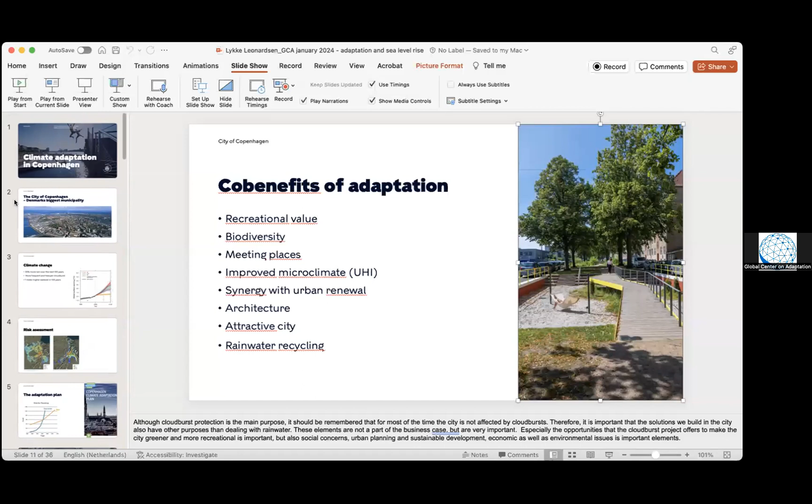Thanks. Thank you, Nick, for this very kind introduction. I hope somebody can put on the screen the first slide. Oh, thank you. Sorry, that's Copenhagen. Sorry, yeah, no. So we need the Rotterdam presentation. Yes, exactly, thank you very much.

Thanks, Nick and others, for giving me the opportunity to share our experiences on the city of Rotterdam and how we are adapting. Let's move to the second slide. That's okay, because I think it's always good for the audience to start with the bigger picture, the bigger map of the Netherlands.

On the next slide, you can see the reason why water resilience will always be on our agenda. Water is coming from all directions: from the sea, from the rivers, we have precipitation that is changing pattern, and groundwater levels are changing. But at the same time, we as human beings have been paving and making the city more concrete. It is a concrete jungle, as we could call it. We are urbanizing, building more houses and high-rises, and that is already creating a lack of water storage.

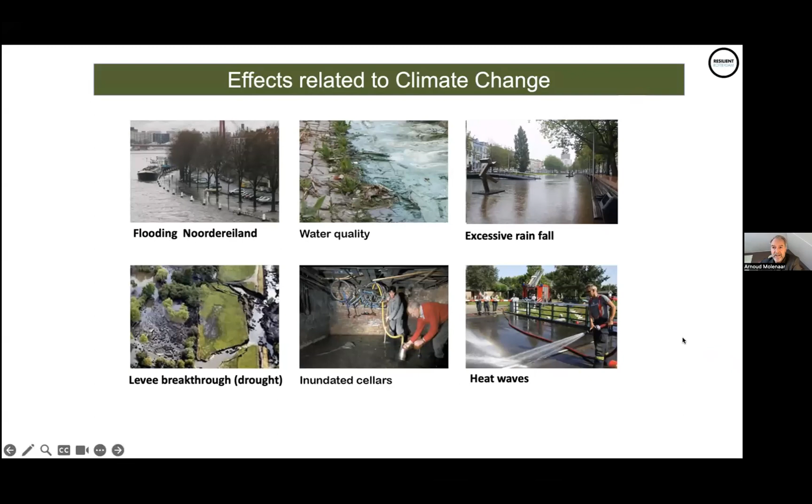I think we are now in the second edition of our climate adaptation strategy, and also the second edition of our resilience strategy. So it's a process, and it's iterative. It's getting more and more integrated, and that's the message I want to share with you using this slide.

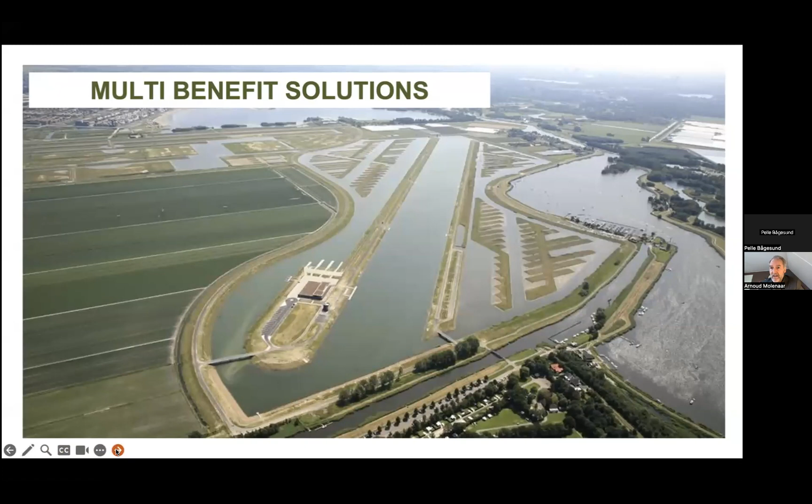Actually, we really want to spend our money more in redesigning the public space, and to add more urban quality, and at the same time allowing and creating more water storage. So we are working on an adaptive and attractive city at the same time.

So another type of solution is, I think, well known, but we have been implementing nearly 600,000 square meters of green roof in all types. We started with the easy ones, you could say, the quick wins.

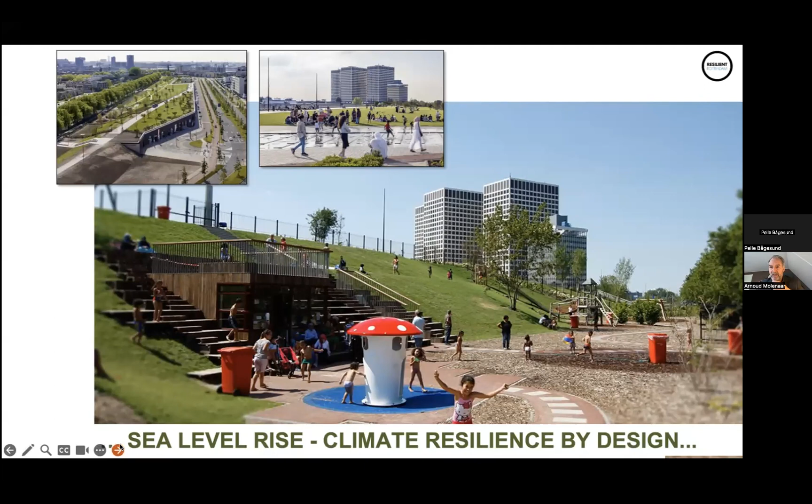And the next slide shows another type of solutions that we are working on, what we call the tidal parks. So we are a coastal city with a huge coastline and river, and we are also a port, of course, and that's why we have a lot of concrete embankments. That's of course necessary for a port.

At the same time, we identified a lot of kilometers that we can transform into more natural embankments. And this is creating new habitat. It is also reducing the velocity of waves. So this can also be seen as part of becoming a more climate adaptive coastal city, using nature-based solutions in this case.

And another final type of solutions is what we call floating urban development. We call it pilots, but I don't think we can call it pilots anymore. We are just developing on a larger scale and upscaling this: floating homes and offices and buildings, and even a floating farm.

And this is not comparable with the simple boathouses in the inland canals in the city. This is all on water with a high tide and low tide difference of 1.5 meters, directly connected to the open sea. So we see in this way of developing our Delta city also an opportunity to create additional urban space with quality, waterfront, etc. This is a high value place in the city.

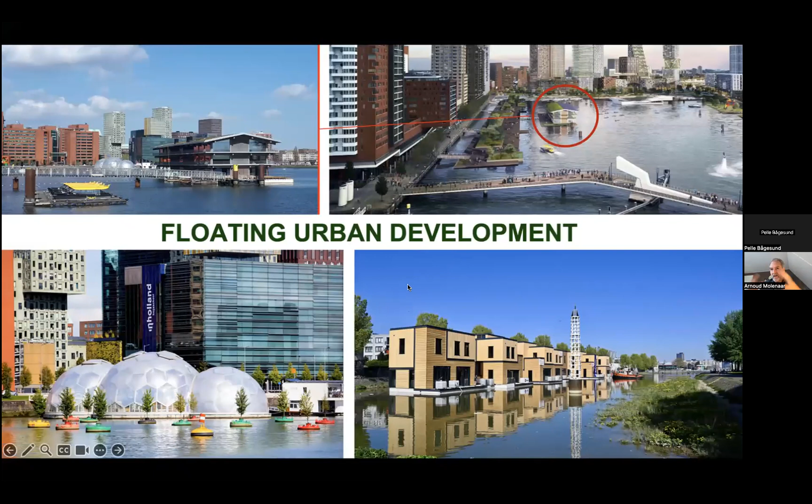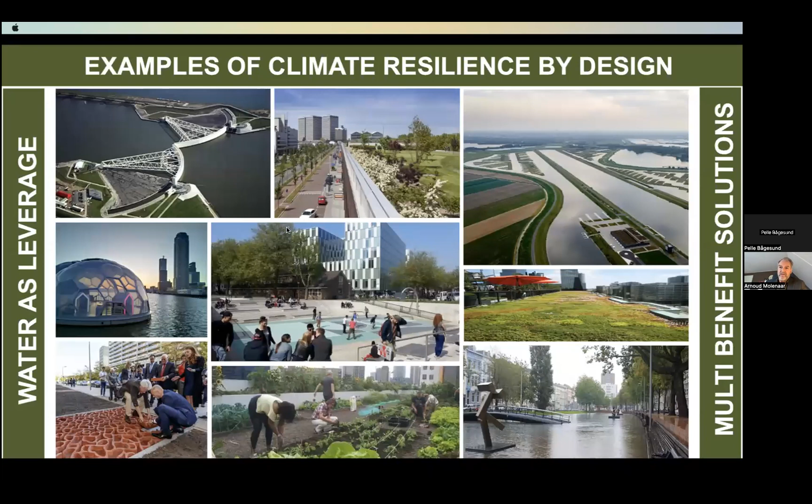So the next slide shows a whole overview of all types of solutions. I think I had to speed up a little bit. We are also thinking ahead, because we want to invest in more integrated solutions, even more integrated than we have done so far, like this one.

So not only developing and using our flat roof landscape just for greening the city, but also in combination with the mitigation ambitions that we have. Solar panels are more efficient on a green roof, that has been scientifically proven. So you can use your roofs for mitigation and adaptation at the same time. This is just one example of how you can use your rooftop landscape in a good way.

And the next slide shows an example: that's an artist's impression about the Rijnhaven, where also the floating office of the GCA is located. Here we are, about the master plan of this old port area where we are creating a floating park.

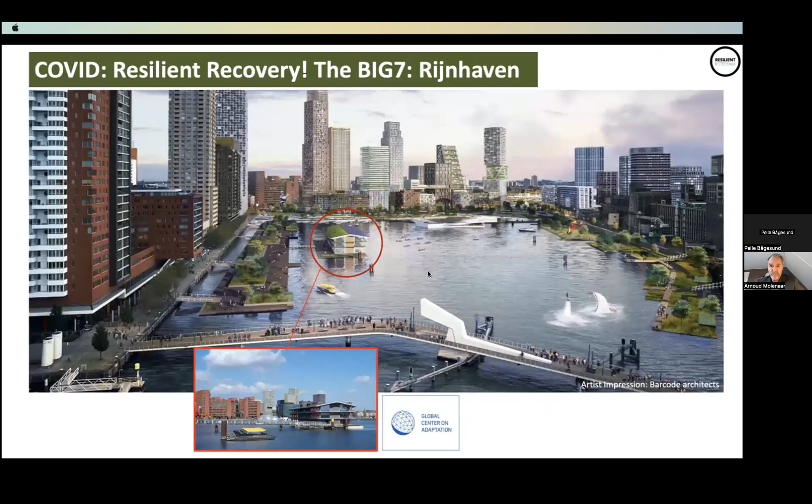And this is one of the big 7, as we call it. This has been announced during COVID to really give the investments and the economy a boost in the city. And all these big 7 projects, as the next slide also shows as an example, they all include adaptation. So we want to use adaptation also from an economical perspective, to give the city an impulse.

This will become what we call the Rotterdam High Line. It is an old railway of a few kilometers right in the center, and it will be transformed also into a longitudinal park, which will add again urban quality and biodiversity.

It is good for the people living in these neighborhoods, but it will also improve and increase the adaptiveness of the city.

And finally, I'm nearly there, Nick. We are also looking ahead into the future, because we realize that climate change is not only there; it is accelerating.

So we are now not only looking at the consequences of maybe 1 meter sea level rise, but also looking at how we have to look at the spatial development of the western part of Holland, including Rotterdam, taking into account maybe 3 meters of sea level rise or even more. What are the consequences of this? How and where do we have to invest? So this is really an important thing.

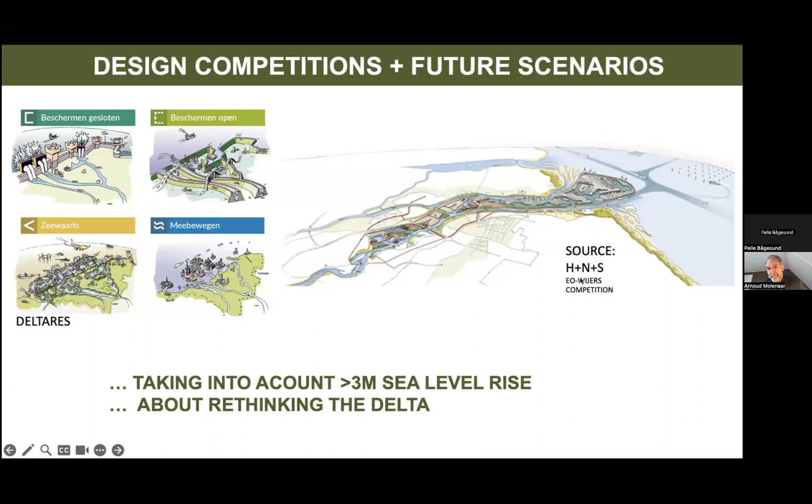And I think it's interesting also to share with other coastal cities. And then, of course, we're not doing this alone. I think this is why we have this webinar, it's good to share our stories. So what are the opportunities, but also the challenges, especially regarding the long-term future and accelerating sea level rise.

Some cities are talking about managed retreat, and what I would like to propose is to start a working group with some coastal cities to have a dialogue about this. One possibility is to also use the city networks that we are part of, and in this case, we are happy to be a member of the Resilient Cities Network.

So that brings me to the final slide, just some concluding remarks. I think it's good for the audience, we can share a PDF of the presentation, of course, but just some final remarks.

It is a data-driven approach, you could say, also a holistic approach. It's not just investing in adaptation because we have a problem. No, we want to become an attractive city using climate adaptation. So we turn it around, it's a paradigm shift, you could say.

And the ownership amongst all stakeholders is, of course, an important one. But also, I haven't talked a lot about that, but the involvement of the residents, which is done on specific projects in the districts, that is also really crucial. I think I'll stop here because I already talked, I don't know for how many minutes, long enough.

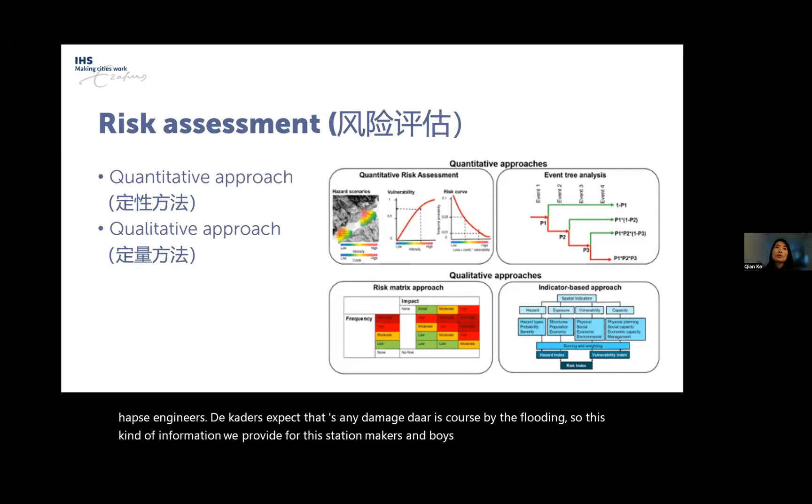We also have the approach of event tree analysis, which is more about determining the occurrence probability of one hazard, through the steps of different failure events, then we calculate the occurrence probability.

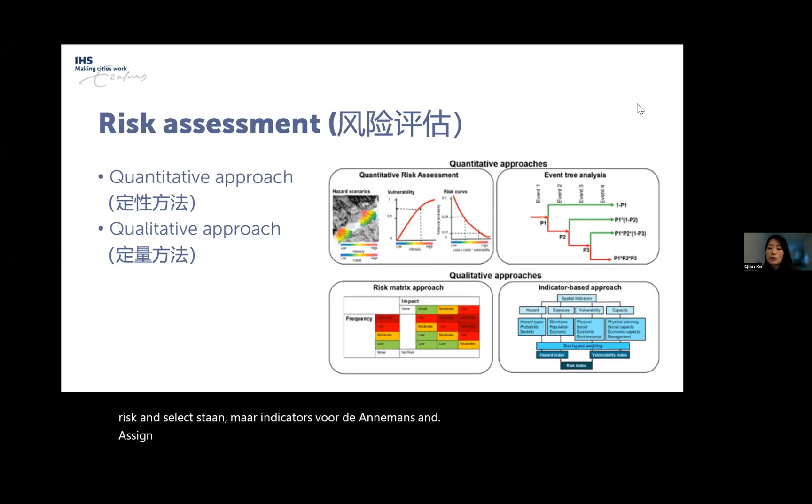For the qualitative approach, we use the risk matrix approach, because this approach can be used for assessment of whole cities, for different kinds of natural hazards, and also for one specific area. This approach considers the components of risk - frequency and impact - and the indicator-based approach also considers all the elements of risk, selecting indicators for these elements and assigning scores and weights by expert judgment, and in the end we calculate the risk index.

In the next presentation, I'm going to focus on the quantitative analysis. But first, here's an example to show the risk matrix we can use to further inform our decision makers by assigning scores for the likelihood and impact.

These are the two important components of risk. In the end, we get the risk score, and we can put a label for the rating from low to very high risk.

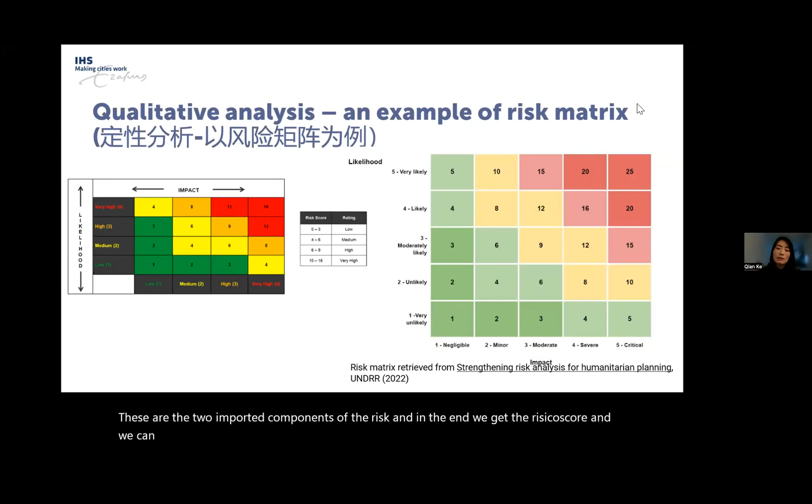For the quantitative analysis, we first follow hazard modeling, exposure, vulnerability assessment, and then calculate the risk. The first step is to calculate the occurrence probability of flooding. We calculate this based on long-term series of hydrologic data, so we can determine the occurrence probability of a given water level, and then produce flood maps based on the hydrologic model. The flood maps provide information about the inundation extent and maximum inundation depth, etc.

For damage assessment, we use GIS data to identify how much population and economic assets will be exposed under these kinds of events. Then, based on the vulnerability curve, we calculate how much potential damage can be caused, and in the end, calculate the risk.

What kind of data do we require for this quantitative risk assessment? Starting from the hazards, we need to use statistical models, usually based on long-term series of hydrological or meteorological data, to identify the different return periods of flood events. We use this data as input into hydrologic and hydrodynamic models to calculate the rainfall runoff and also the water level in the river and the sea.

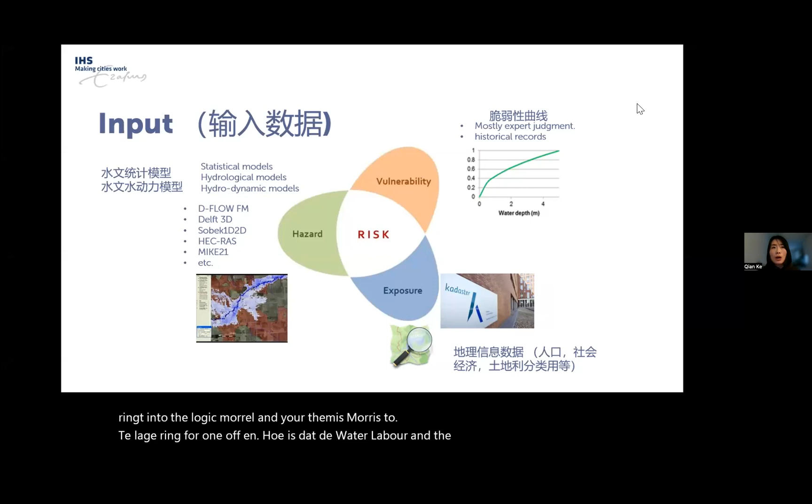Some very popular software we can use here in the Netherlands is Delft3D and D-Flow Flexible Mesh, and also Sobek 1D2D. In some other countries like the USA we use HEC-RAS, and also in Denmark we use MIKE 21. So there are many alternatives we can use to help assess the hazards.

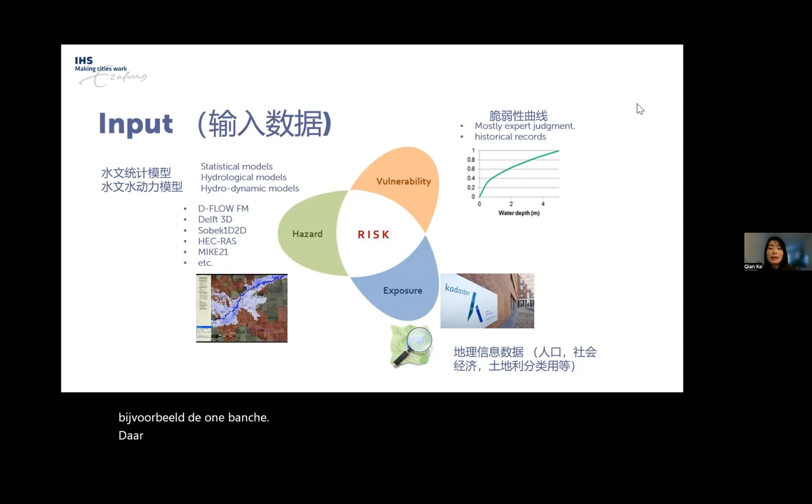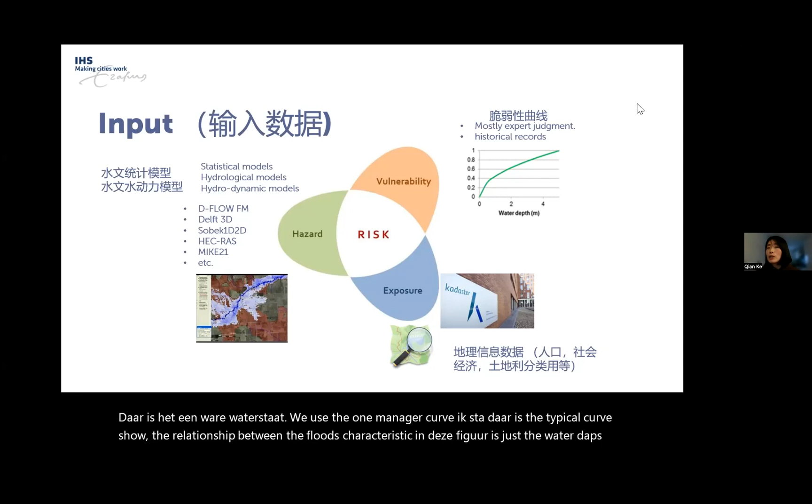For the vulnerability, we use the vulnerability curve, a typical curve showing the relationship between the flood characteristics. In this figure, it shows the water depths and the potential damage degree or absolute damage value. This kind of data we get mostly based on expert judgment, and we also collect historic flood event records to produce such vulnerability curves.

For the exposure, that is more about the GIS data - population maps, socioeconomic maps, land use maps. These kinds of maps can help us identify how much elements at risk will be exposed.

For the hazard modeling, let's take the coastal city as an example, like Weihai, which is frequently affected by tropical cyclones - here in China we call it typhoon. The typhoon usually brings storm surge and waves, and also simultaneously brings a lot of rainfall. These cause high water levels and also failure of the sea dikes, and overtopping discharge in the coastal areas, which eventually causes flooding inland.

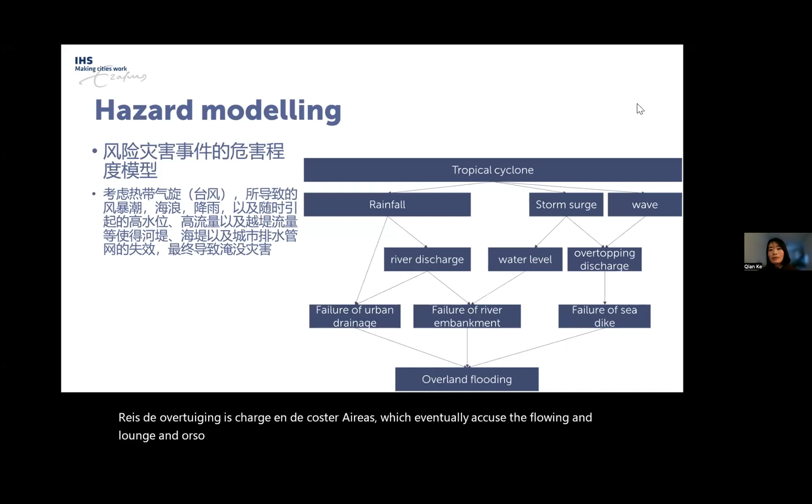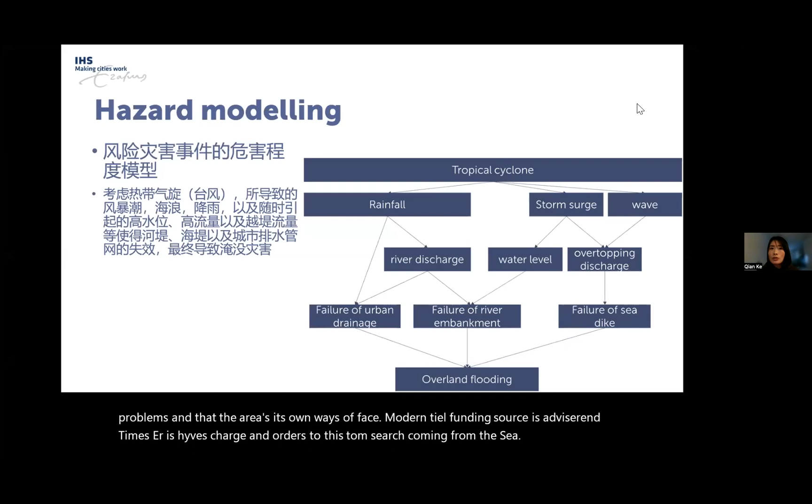The rainfall will also cause high river discharge, and that is a very typical problem in delta areas - they always face more than two flooding sources at the same time. There is high river discharge and also storm surge coming from the sea. The high river discharge also sometimes blocks the drainage, significantly undermining the drainage capacity in the city. That is the main reason causing urban flooding in coastal cities.

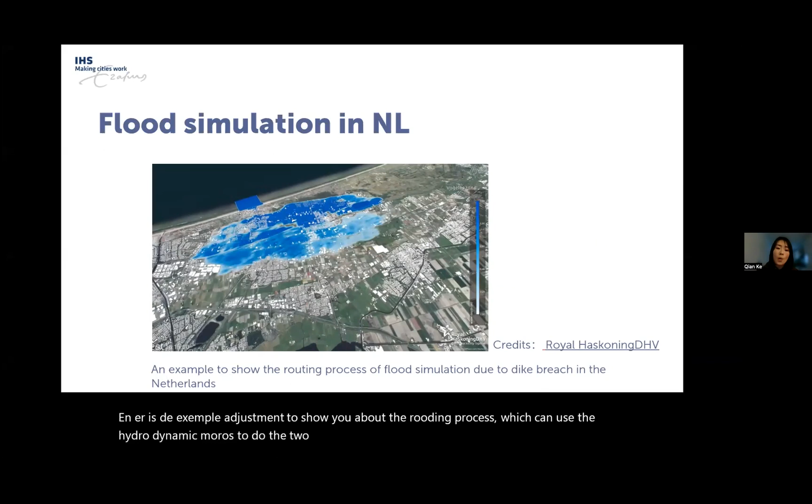There is one example I want to show you about the routing process. We can use hydrodynamic models to simulate the flooding. This example shows flooding due to a dike breach in Rotterdam, in the coastal areas in the Netherlands, and it shows how the flooding expands inland, with the blue and gray colors showing the different inundation depths.

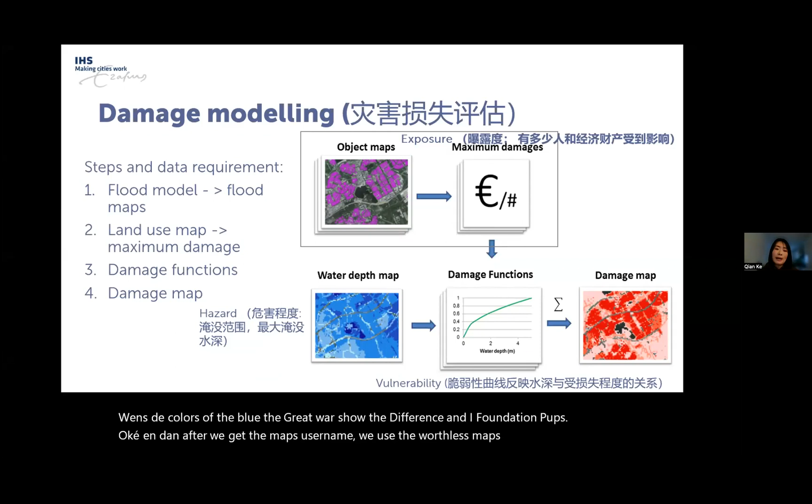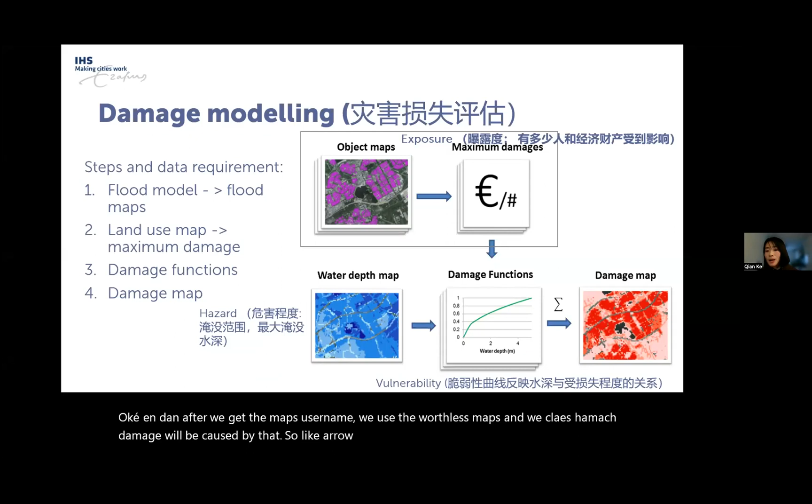After we get the flood maps, usually we use the water depth maps and calculate how much damage will be caused. Like I already mentioned, we use the vulnerability curves, and also based on the GIS data, we can produce damage maps, which provide information for decision makers to check how much damage is caused in some specific area. Then we can decide what kind of measures to take next.

For the risk assessment, in the end there is the result about total risk. We combine many different events into maps or aggregate damages for different exceedance probabilities.

After we get the risk map, the government will think about proposing some adaptation measures to deal with the flooding. Usually we use cost benefit analysis to trade off the costs and benefits, and to evaluate and prioritize the list of climate adaptation options. This is also important for the government in optimizing the allocation of resources. The question answered by the cost benefit analysis is how much should be invested in which adaptation options, and at what time, to create the highest benefit at reasonable cost and within available budget.

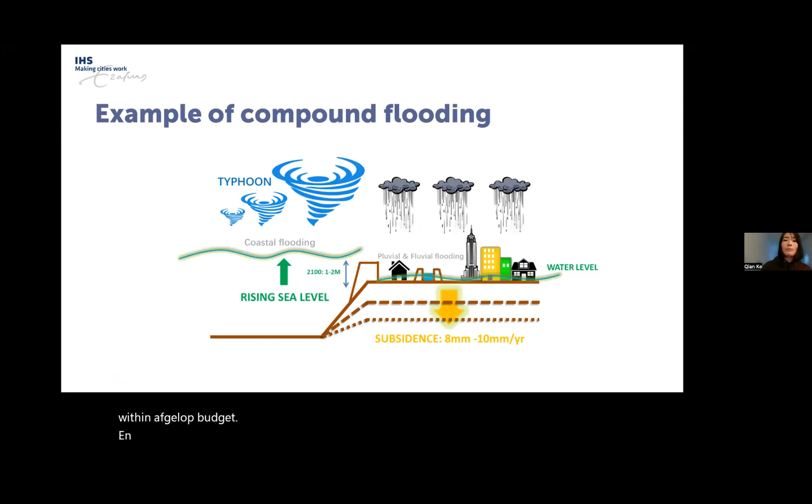This figure shows an example of compound flooding in Shanghai, actually a project I did before. So when we do the coastal climate risk assessment, we have to take into account the different flood sources that can occur simultaneously or subsequently in a short time.

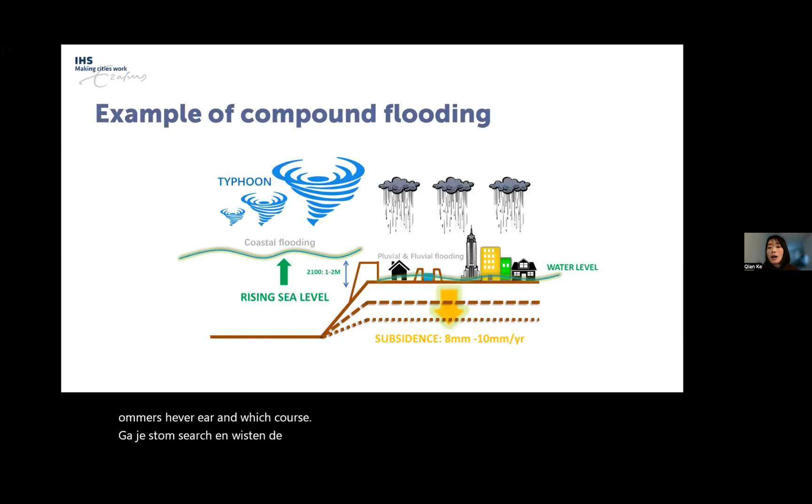In Shanghai's case, it's also affected by the typhoon almost every year, which causes high storm surge, along with the possibility of high astronomical tide occurring in coastal areas, which can cause coastal flooding. At the same time, the typhoon also brings rainfall, which causes high river discharge in the upstream.

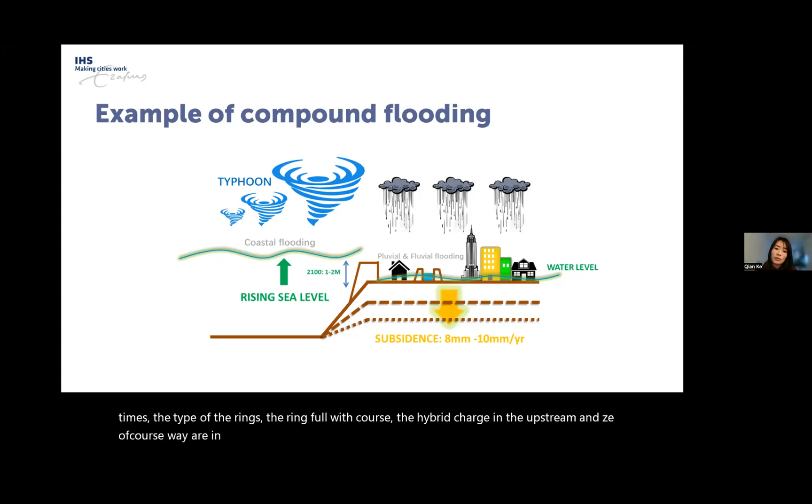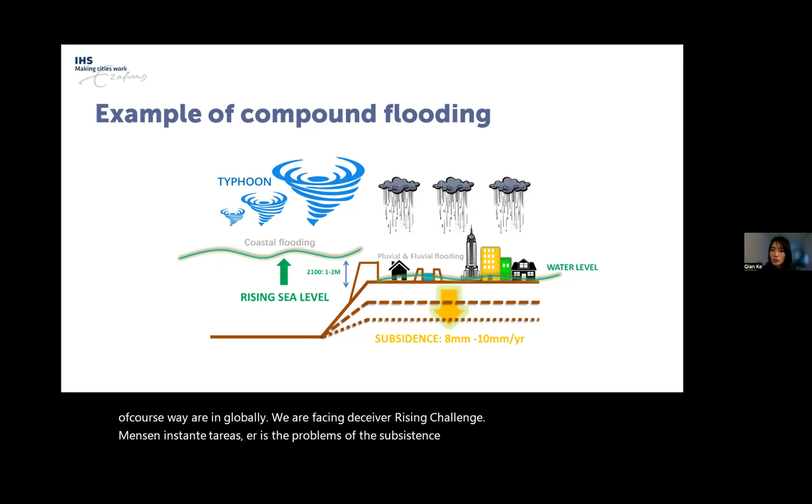Globally, we are facing the sea level rise challenge, and in some delta areas there are problems of subsidence. So these problems are coming from different directions, which pose threats in the future.

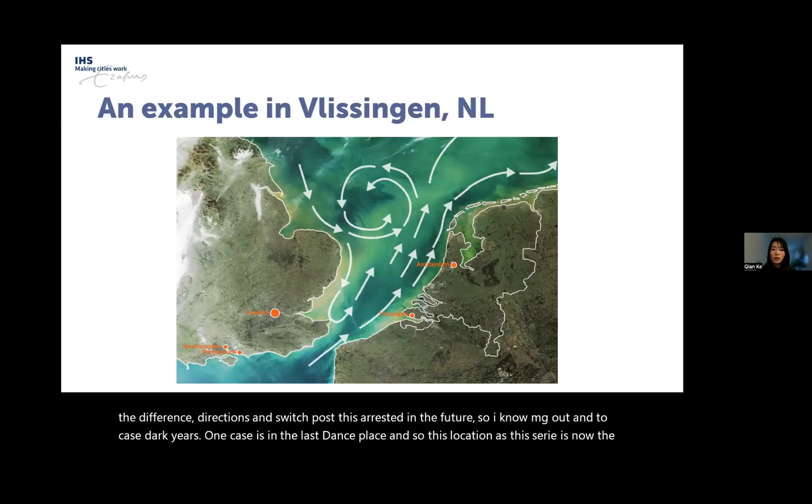Now I'm going to talk about two case studies. One case is Vlissingen in the Netherlands. This city is located in the southwest province of the Netherlands, at the connection of the North Sea and the river Westerschelde. Because of this connection between sea and river, Vlissingen is very vulnerable to tidal effects and storms during winter time.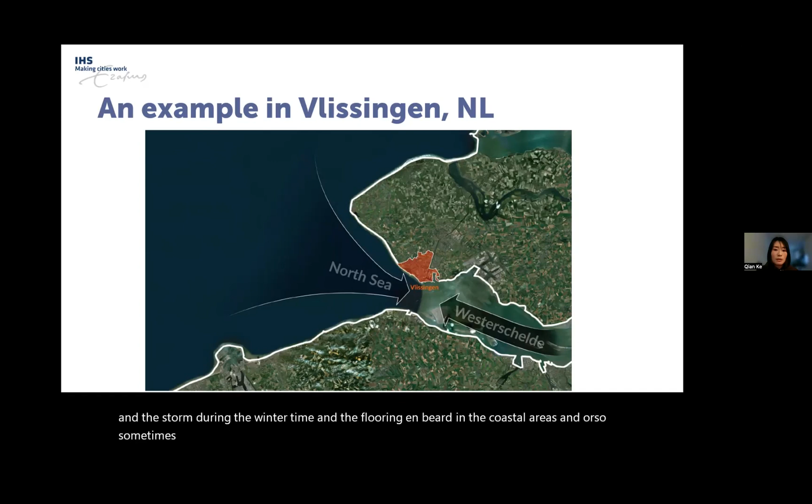Flooding can occur in coastal areas, and the government is also concerned that in the future, with sea level rising, it could cause urban flooding in the cities. The local governments were thinking about two adaptation measures: one is to increase the height of the dikes, and the other is to redirect and store the flood water.

Here are some design ideas about redirecting and using retention areas to temporarily store the flood water. You can see the blue colors, which show how the water can be redirected into the inland area.

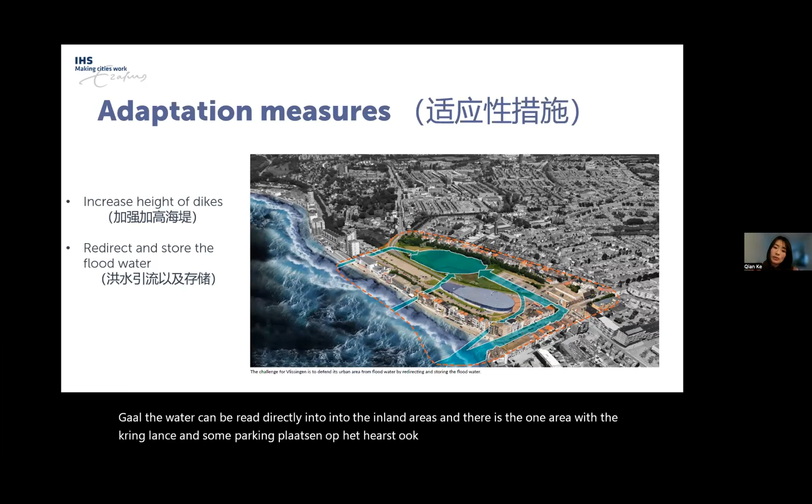There is one area with green land and some parking plots. The government is thinking they may use these areas to temporarily store the water, and after the flooding, they can pump the water out into the canals or other waterways. That is the idea.

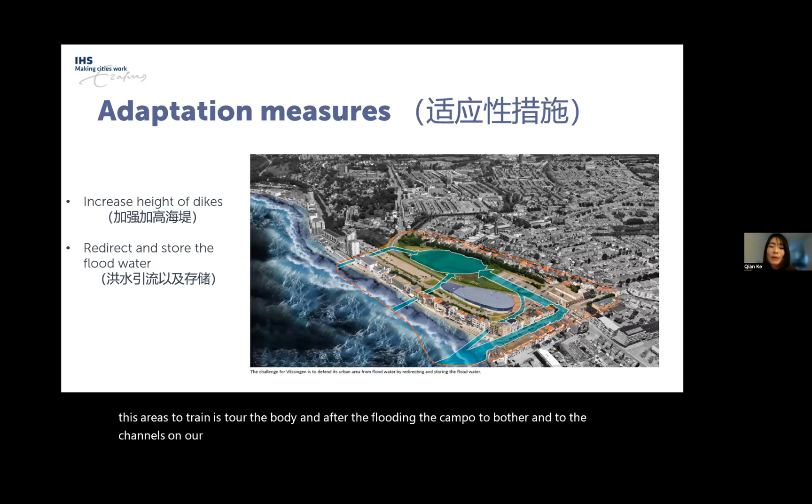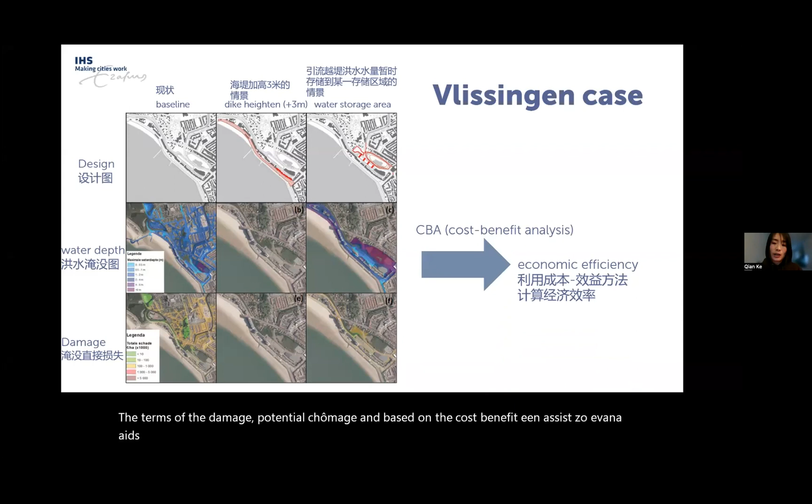After that, we got water depth maps for the baseline and two scenarios, and we compared them in terms of potential damage, based on cost-benefit analysis, to evaluate the economic efficiency of the two proposed adaptation options.

Some preliminary damage assessment results here. According to Dutch methods, we can calculate how much economic damage can be caused by the flooding, and also how many people will be potentially killed or affected.

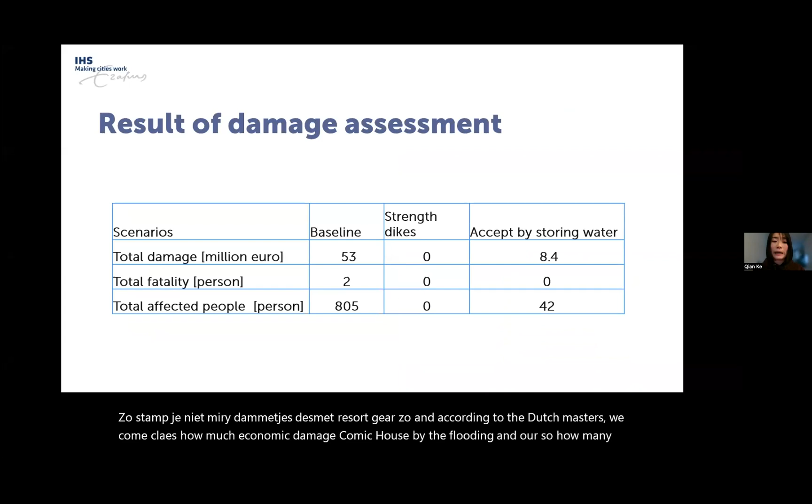Here we get some values and figures, and from an economic point of view we can quantify the potential damage and affected people in monetary terms for this case. We can use this to compare the different scenarios.

In the end, we get how much damage and how many people are affected, and we calculate how much cost will be involved, then we calculate the expected annual damage. It should be noted that for this approach we only consider economic benefits, but there are other benefits like environmental or societal benefits that are not included here, though they also matter a lot when we make final decisions.

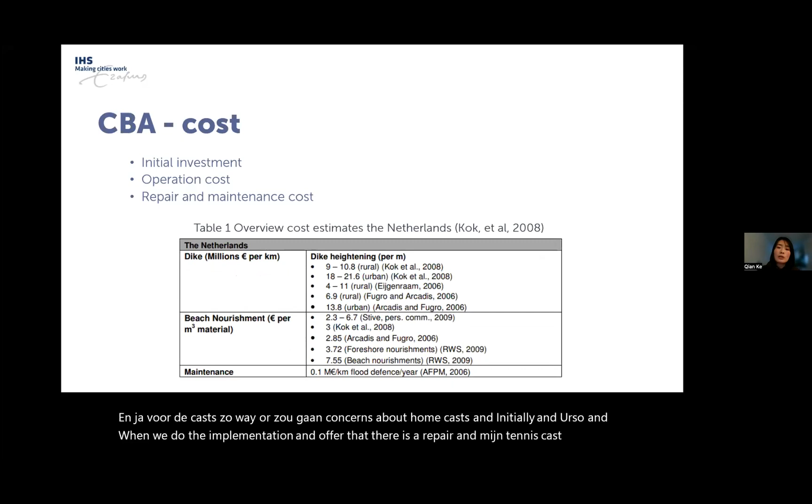For the costs, we also considered how much it costs initially, and when we do the implementation, there are repair and maintenance costs involved afterward. There is one table showing the overview of cost estimates in the Netherlands for the dikes and other measures.

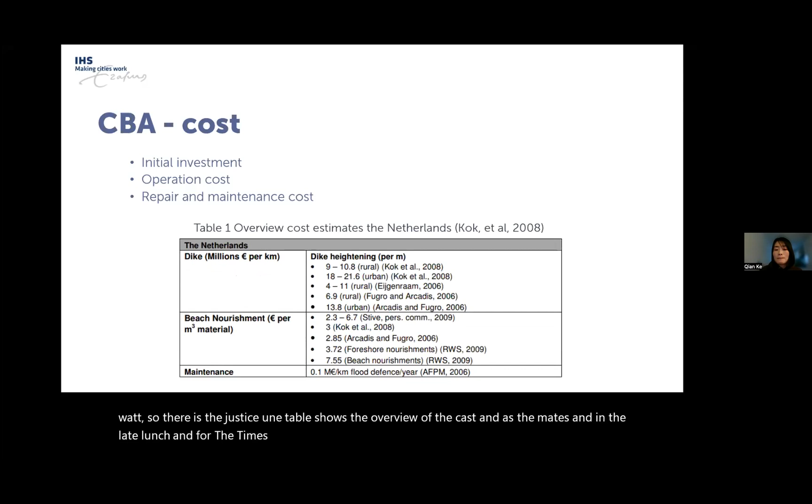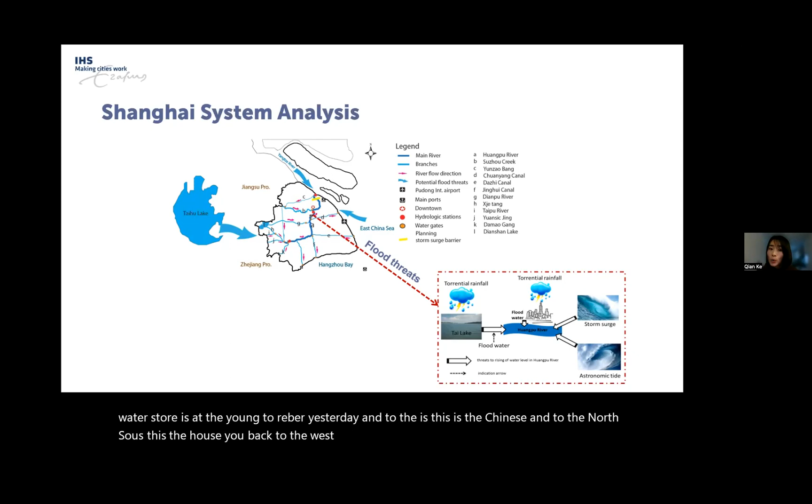For Shanghai, the next case is in China. As you know, Shanghai is surrounded by water. It's at the Yangtze River estuary, with the East China Sea to the east and Hangzhou Bay to the south. To the west there is Taihu Lake, which discharges some water through the Huangpu River in Shanghai. When the typhoon comes to Shanghai, it causes high storm surge, and there could be the possibility of high astronomical tide occurring during that period.

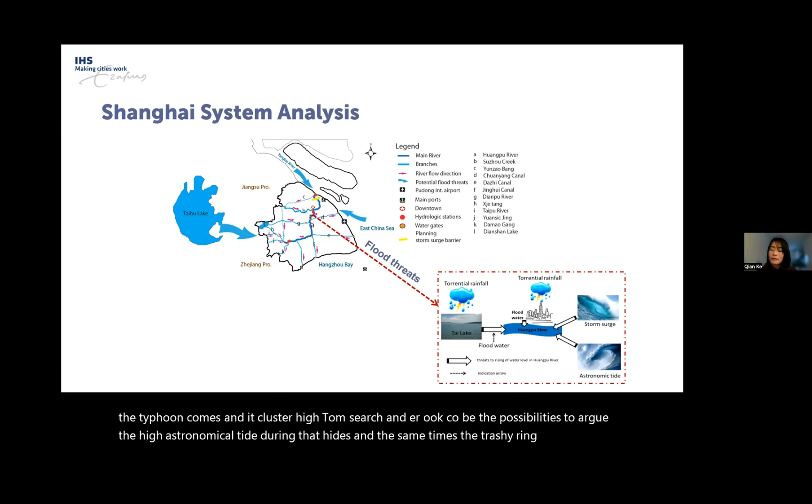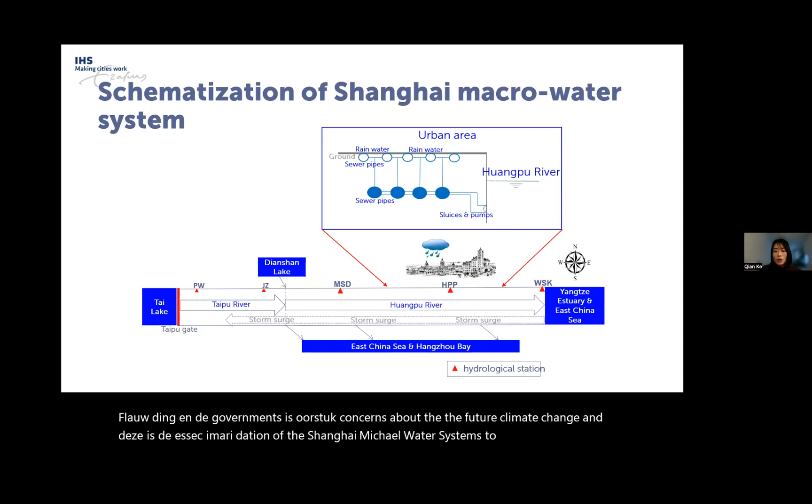At the same time, the torrential rainfall also causes a lot of water in the city, so Shanghai is actually facing compound flooding, and the government is also concerned about future climate change. This is a schematization of the Shanghai macro-water system, showing how the storm surge at the estuary will reverse the flow direction in the river, which occurs at the same time as high discharge from the upstream.

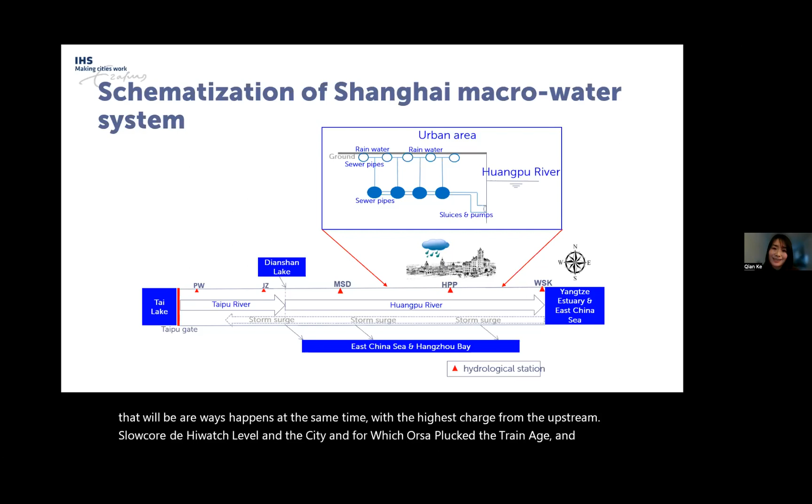So of course the high water level in the city also blocks the drainage and undermines the drainage capacity. So that is the big problem in Shanghai - inundation on the streets.

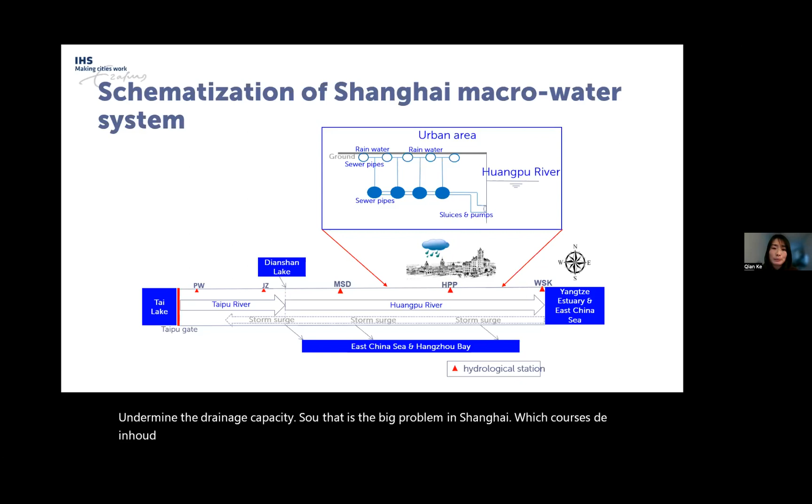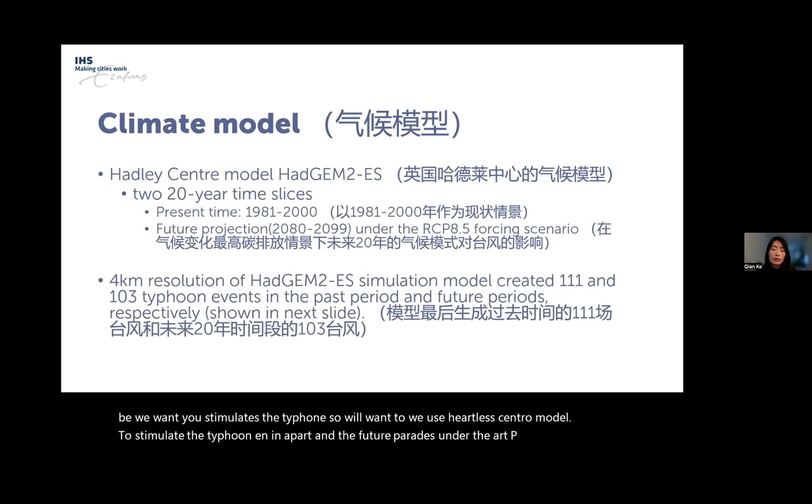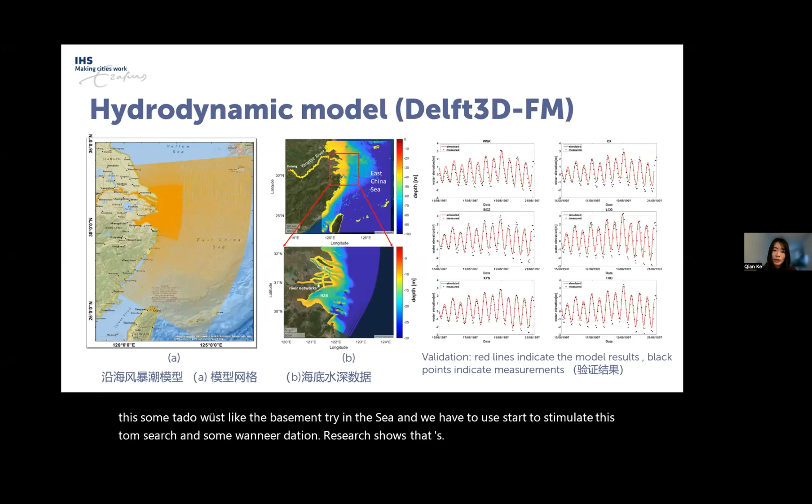And we use the Delft3D Flexible Mesh. The left-hand side shows the grid cells we used for it, and the right-hand side shows data used like the bathymetry in the sea, which we use to simulate the storm surge. Validation results show that this model has been validated.

And for Shanghai, there are also problems of sea level rise. Climate change also changes the climatology, so it will intensify the typhoon, increasing wind speed and pressure, potentially causing high storm surge in the coastal areas.

The left-hand side shows sea level rise projections in Shanghai at the end of this century, and the right-hand side shows simulation results of the potential typhoon affecting Shanghai. This is also the rain rate - the potential rainfall intensity caused in this area. Then we use this as input to calculate how much inundation occurs in the city.

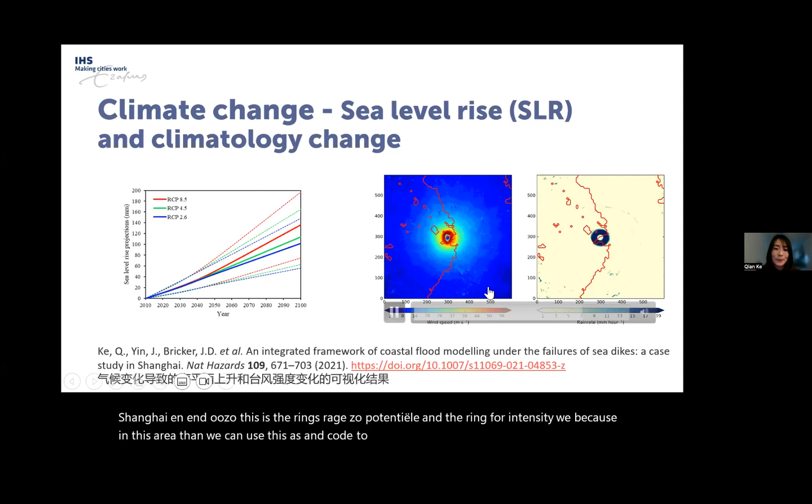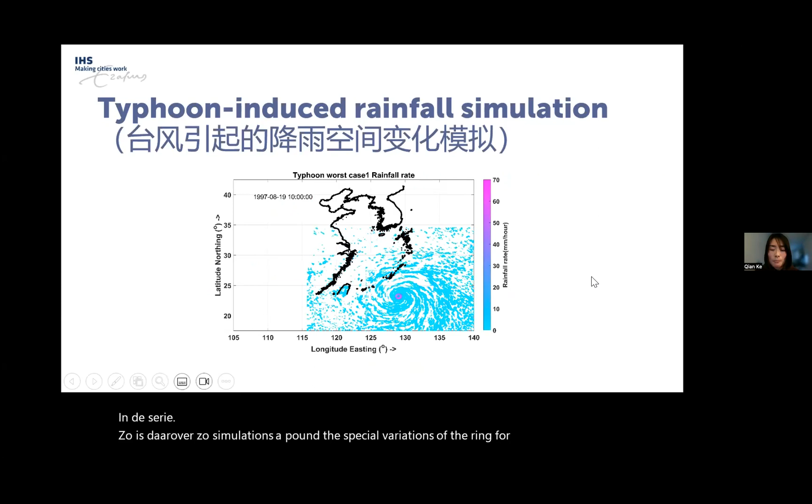There are also some simulations about the spatial variations of the rainfall rates we simulated for one typhoon event - I have to speed up.

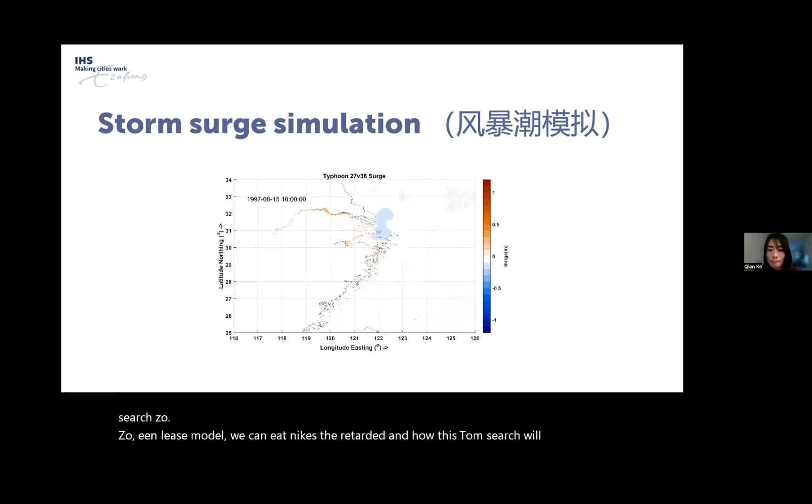And this is the results of the storm surge. In this model we can easily get the results of how the storm surge will be caused in the coastal areas of Shanghai. Then we put this in our model to calculate the failure probabilities of the sea dikes, and then simulate the overland flood model.

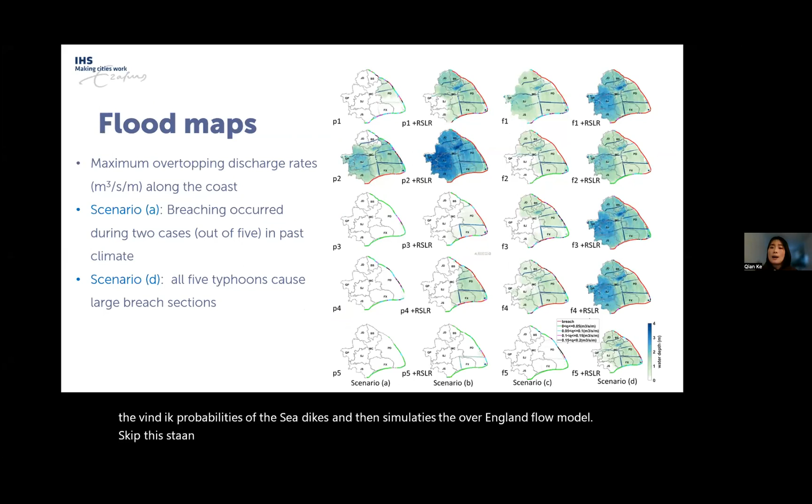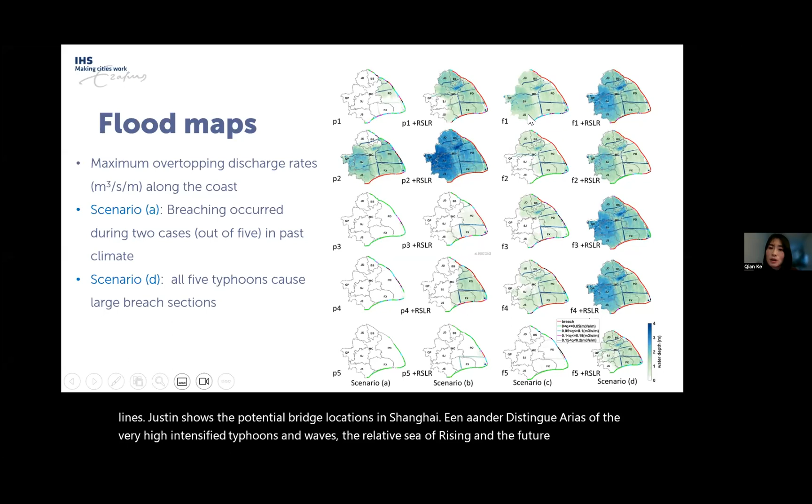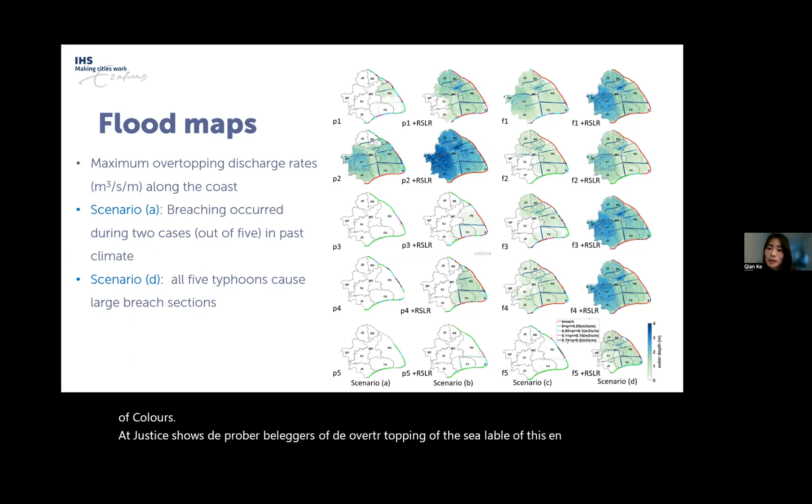I need to skip this. There are the map results for our Shanghai project. It shows - these red lines show the potential breach locations in Shanghai under scenarios of very high intensified typhoons with relative sea level rise in the future. The other colors show the probabilities of overtopping of the sea dikes, and then we can simulate the inundation in different districts.

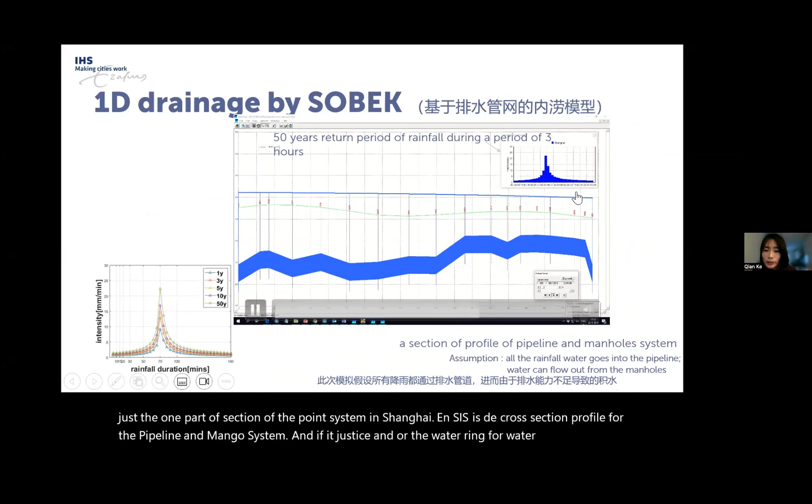I also want to show a simulation of the Wanli drainage basin - this is just one section of the pipeline system in Shanghai, and this is the cross section profile for the pipeline and manhole system. If we assume all the rainfall water goes into the pipeline, the water can easily flow out from the manholes, as this blue line shows.

And we also can simulate how much water is on the streets under different return periods of the rainfall.

So my last slide is about reflection and discussion with you. We propose that for coastal areas, if we do the climate risk assessment, we need to develop an integrated framework to consider the combined effects of sea level rise, land subsidence, and increasing tropical cyclone intensity. But this quantitative approach requires multiple data, and the quality of the data also matters.

And with future climate change, at least for the Shanghai case, the relative sea level rise is likely to have a larger effect than the tropical cyclone climatology change on the dike failure probabilities.

Thank you so much for your listening, and welcome any questions.

Thanks very much, Qian. We have a question from one of the participants regarding the modification of dike height. I think it's a question that applies to both your presentation and that of Arno, so you can always also provide more detail in the chat. Their question is whether this is primarily for adaptation purposes, and whether it takes into account blue or green infrastructure. Just provide perhaps some generic reflections, because it's not very specific to which part of the presentation it's referring to.

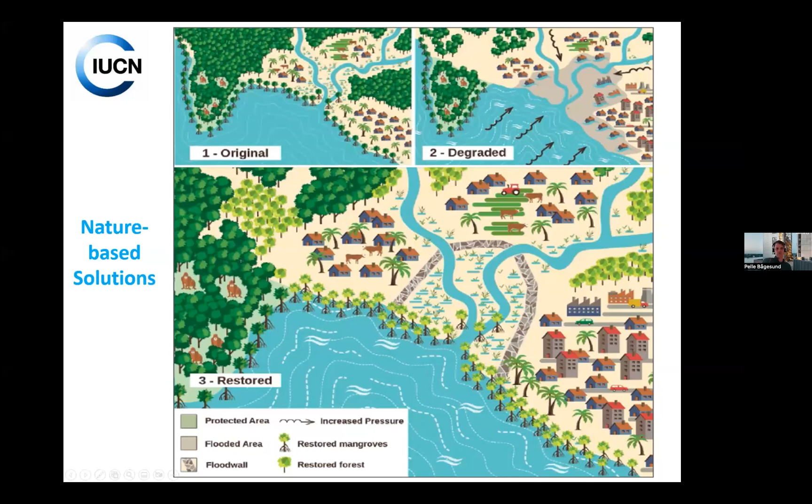And that's where our role comes into this. As consultants, we then assess the situation in the urban planning process. And the aim is to inspire holistic solutions, both through overall thoughts, questions, and real examples of the different projects.

I'll just give some examples here, because in general, all water in the city and activities in and around them are connected. That's why we promote - we need to have an integrated and holistic approach, because these things don't happen in silos. They are connected. Often different units, companies, solutions for different areas are needed. Individual interventions are often ineffective and sometimes not sufficient. So instead, we need to take advantage of synergies between these different solutions.

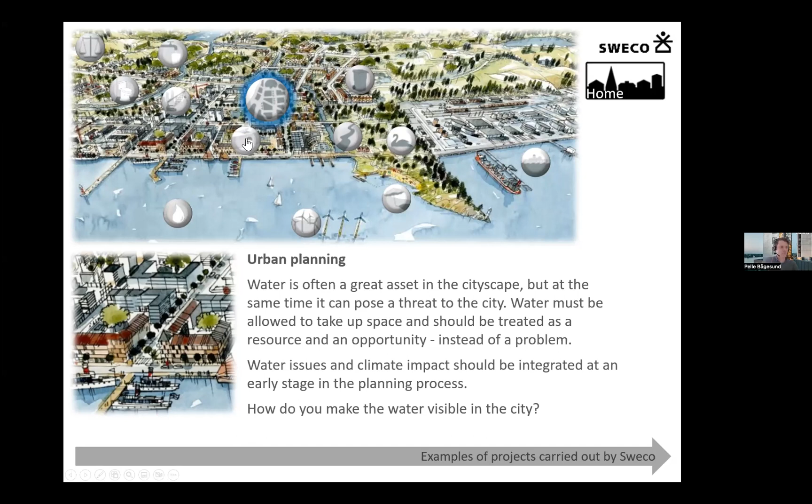So for example, if we just press here, you'll have this in Chinese as well in the handouts, but if you go to the English one, you can even press yourself around like this. You can read about what we do in urban planning, and this is examples of how we work in Sweco in these areas: urban development, wastewater, drinking water.

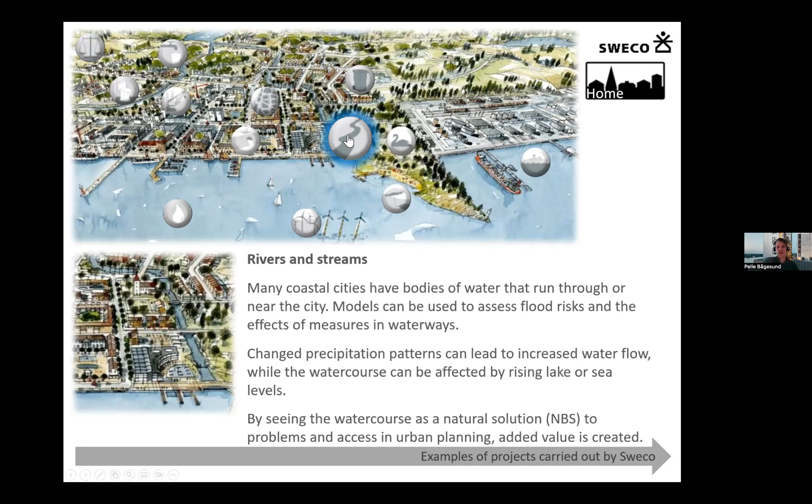And then we have these specific environmental examples where rivers and streams - many coastal cities have bodies of water that run through or near the city. And as explained in the previous presentation, models can be used to assess flood risks and then the effects of measures in waterways. And by seeing these watercourses as a nature-based solution to problems, these can have added values to the city.

And in natural environments, there's great potential where we can take advantage of nature's own solutions, for example, through flood and erosion protection in the coastal areas, as well as water quality improvement. And these are then so-called nature-based solutions that provide ecosystem services.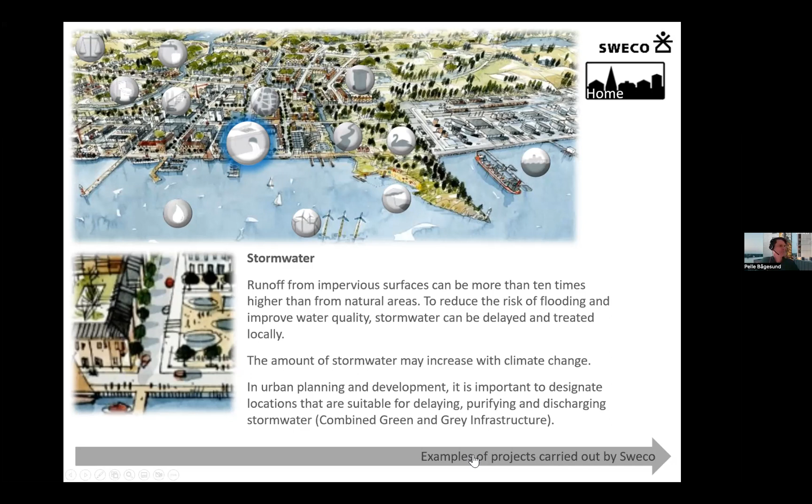There's a number of examples of projects carried out by Sweco in this presentation that I will share, but I won't go through them. You can read about them yourself. But I will introduce two methods or approaches that we use in our urban design and urban development projects.

It is designed to facilitate engagement from relevant city sectors, incorporating multi-sector inputs, so stakeholder involvement is very important. It makes use of open access, freely available data, and aims to offer fit-for-purpose, non-technical information, so that it'd be easier for stakeholders to understand the output. It builds an evidence-based climate change adaptation story for a city, which is a better way to communicate, so this can be understood not just by specific experts or people very involved in this area, but also by the general public.

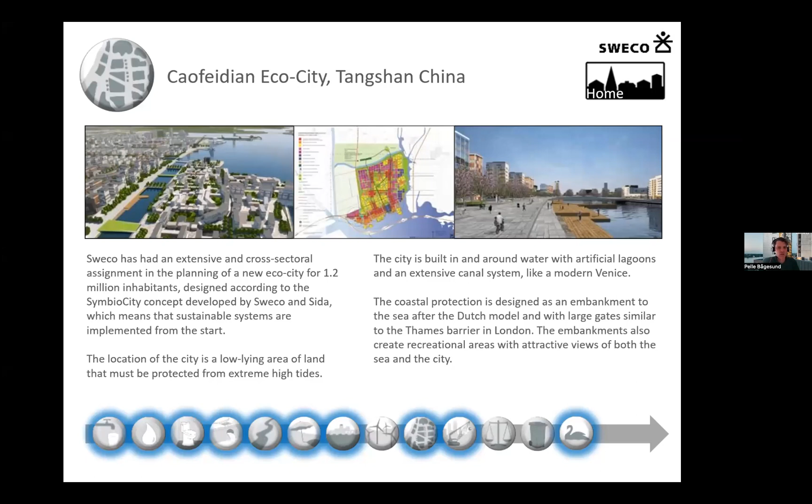An example of that is from Caofeidian Eco City in Tangshan, China, where Sweco had an extensive and cross-sectoral assignment in the planning of a new eco city for 1.2 million inhabitants, according to the SymbioCity concept. The location of the city is a low-lying area of land that must be protected from extreme high tides. It's built around water with artificial lagoons and an extensive canal system. The coastal protection is designed as an embankment to the sea after the Dutch model, with large gates similar to the Thames Barrier in London. The embankments also create recreational areas with attractive views of both the sea and the city.

As mentioned, these examples, you can read about them yourselves. And with that, I would like to thank you for your attention and for giving me the time to introduce Sweco, what we do, and how we do our work. Thank you.

Thanks very much for that, Pelle. That was really great and fascinating presentation.

If I can draw you to where you started, where you presented that picture of a degraded coastal ecosystem, and then how it was improved after that, and then the integrated solution with the flood defense system. In your experience and reflections, what are the incentives and disincentives for the scale-up of nature-based solutions? Because on paper, it looks really great, but in practice, we see much slower uptake.

That is a very good question. I think the main issue, and what we've seen in many projects, speaking as an engineer, is that there are no engineering handbooks on how you do nature-based solutions. They're coming, some are under development, but it's always easier to go back to what you've always done, and that is a challenge. Also, with both engineers and city officials, we tend to go back to knowing exactly how something will look. It's easier to design in concrete because you know exactly what it will look like, but working with nature requires you to be more dynamic and flexible in your approach. So understanding that and being able to use it in your engineering design, that's the main challenge and obstacle right now.

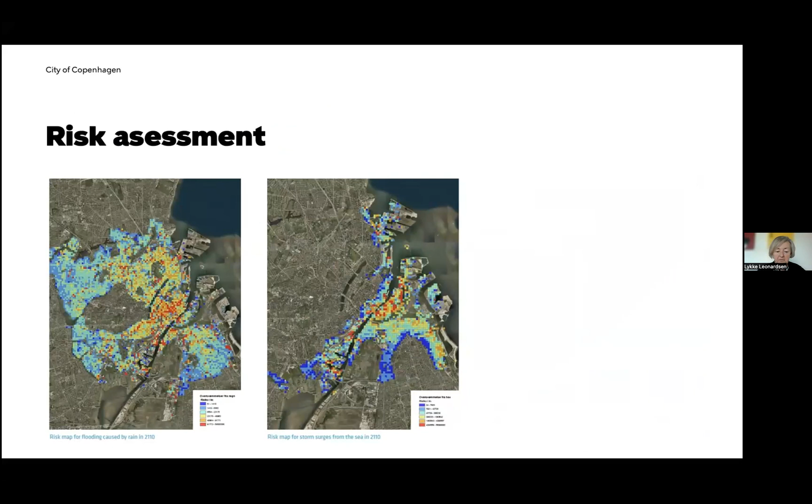We have also tried to make a risk assessment based on where in the city we are actually facing the most risk. On the left, you can see the risk from heavy rain, and on the right, the risk from flooding from the sea.

Again, looking over time, we can see that at the moment the most imminent threat is from rain, but over time, sea level rise will actually also become a very big risk for the city.

We've had our experiences with severe weather. This is from a very big cloudburst in 2011, but lately Denmark has also seen a number of storm surges, as well as flooding from rain. So it's actually become a problem that people are much more aware of.

We have worked on adaptation, as I said, for many years now, starting with the adaptation plan. There you see the timeline for our work on rain, on the cloudburst management plan that we have made for the entire city.

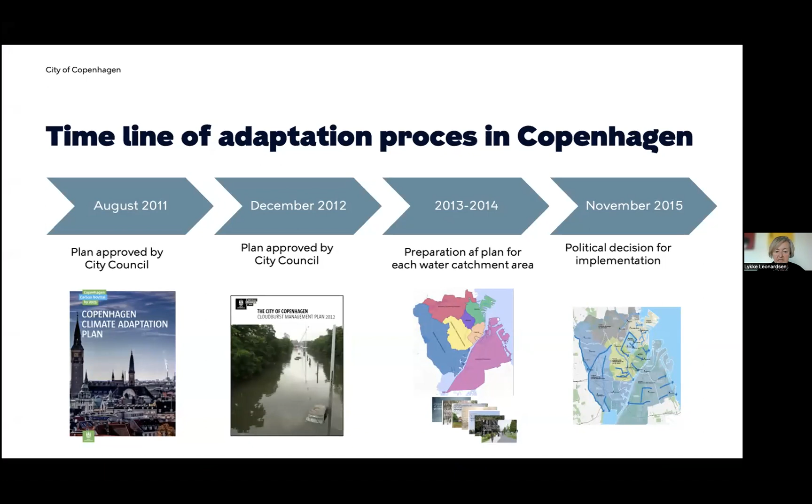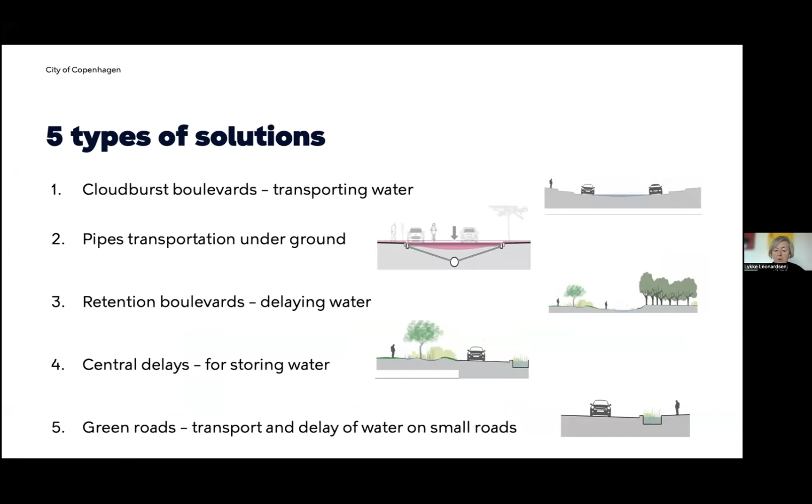Looking at how we work on managing rain, it's very much about creating a parallel infrastructure to our existing sewer system, because we cannot expand our existing sewer system enough to manage these heavy rains, so we need to do something else. One way of doing that in a dense city is to use existing infrastructure - streets for transporting water, parks for storing water, etc.

A lot of this is also looking at - I wouldn't necessarily call them all nature-based solutions, but they're very much at least inspired by the way nature works - working on surface projects, coordinating projects, making it greener, and also trying to see how some of the projects can help with other issues such as the urban heat island effect, that is, the warming of the city over time.

We have our utility that takes care of all our hydraulic systems in the city in general, and the city and the Copenhagen utility are working very closely together on this in a very close partnership.

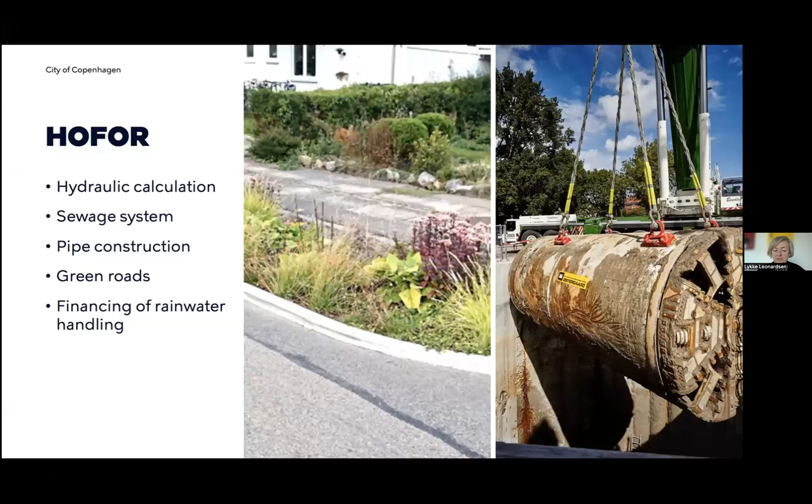We can also see that we have a lot of co-benefits of adaptation. Same as Arno mentioned for Rotterdam, we have this idea of using adaptation to create better neighborhoods and living conditions for people in the city, looking at how we can have more recreational value, more biodiversity, places for people to meet, and improve the microclimate. We can have synergy with urban regeneration, better architecture, making an attractive city, and now we're also beginning to look much more into rainwater recycling, since water scarcity can become an issue in Denmark too.

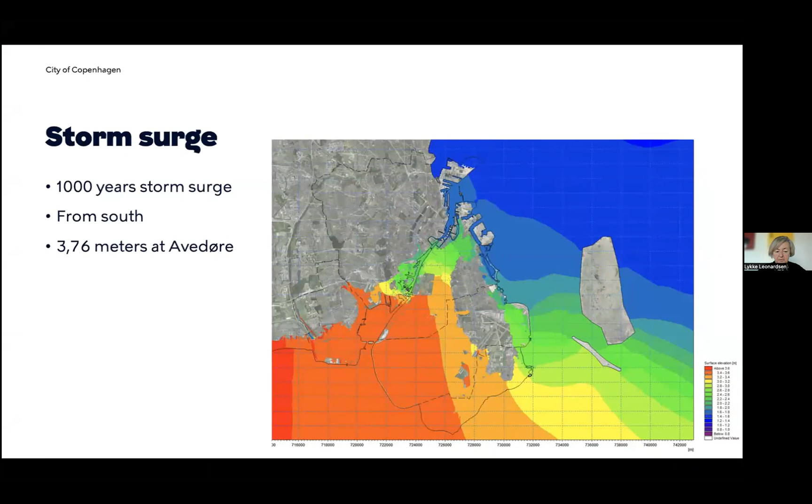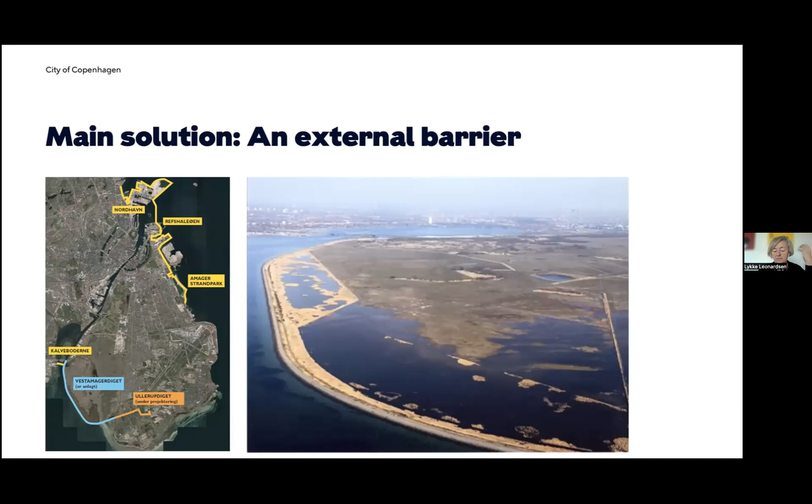The main solution - we're choosing a more Dutch solution here - is to build an external barrier, because defending the city point by point would actually be more expensive and would also take away a lot of the cultural history of the city.

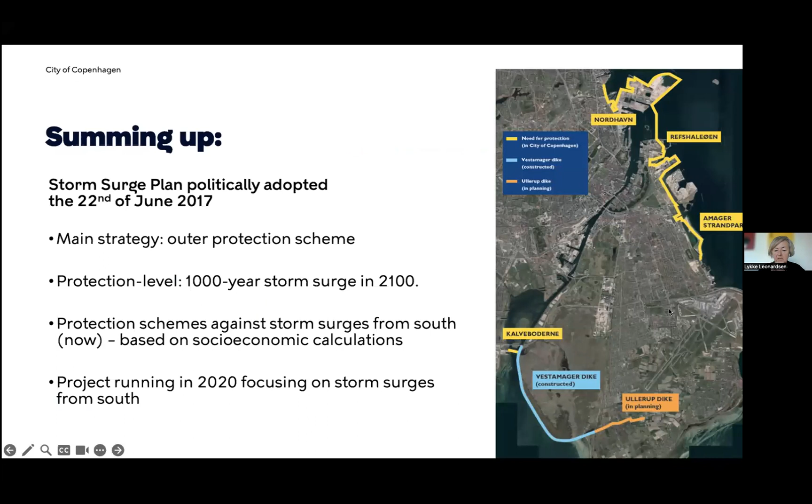So we have a storm surge plan that was adopted in 2017. It's a protection scheme. We are looking at a 1,000-year protection level, and we will actually have a lot of work being done, especially in the southern part of the city, in planning at the moment. I'll get back to what we're doing in the north in a few seconds. And that is what we're doing in the north.

This is a creation of a new peninsula, a new island that will actually be protecting the city, but can also then work as new housing for many people in the city. Up to 35,000 people can live on this island once it's finished in 2070.

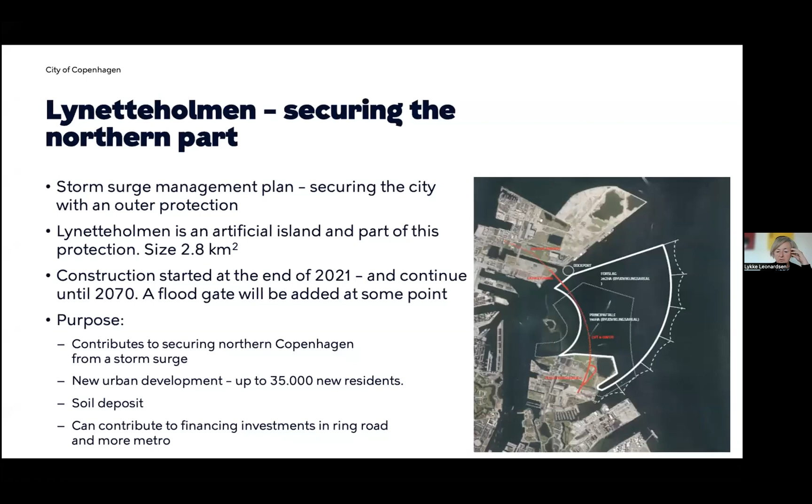It has already started construction, and it will actually be really important in the protection in combination with a barrier, or a flood gate, that can be closed in case of a flood coming in from the north. And it's built sort of on the historical perspectives of how Copenhagen has developed its edges around the city, but then taking into account also nature.

As you can see, a lot of the coastal protection here will be based on nature-based solutions. So there will not be like a hard barrier towards the sea, but it will actually be a much more natural solution that can also have a high recreative purpose when it's not flooded.

There are lots of challenges. I will not go into detail with all of these, but you can have the presentation, and there's a lot of things both on environmental issues, construction issues, and transport that will actually be a challenge for us in the future.

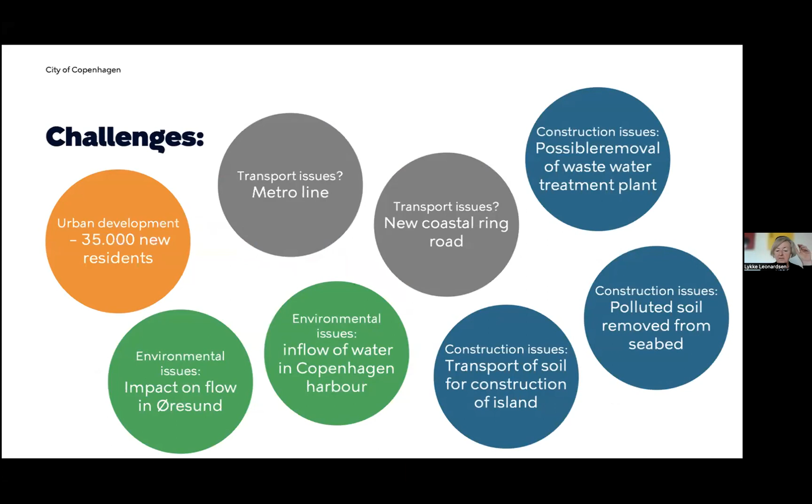In the south, we have a much higher risk than we do have from the north, and we have a project together with neighboring municipalities, and we are at the moment in the planning process also together with our Ministry of Environment, because we need new legislation in order to be able to manage this problem.

There are a number of different solutions here, you can have a string of islands that can be protected, or you can have actually a hard barrier. And the problem with this area is that it is located in a nature protection area. So we are looking to some sort of nature-based solutions in this area in order to be able to preserve the nature values also of this area in the process. But it is an ongoing discussion, how do you do that?

We did a socioeconomic analysis of our whole work on storm surge protection. And there are lots of other things that, apart from the direct damages, there's of course the physical damage, but there are operation losses, there's inconvenience for lots of people living in the city. For instance, our metro system is calculated to actually be out of use for up to 2 years in case of a heavy storm surge. So there is a desperate need for us to do something in order to protect the infrastructure of the city.

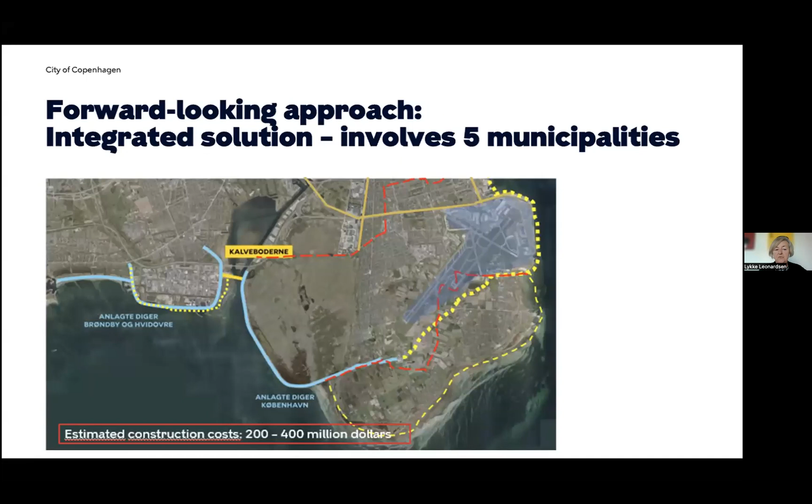And this is my last one. As Arno also said it in his presentation, the multidisciplinary collaboration is really essential, break down silos. All our projects, whether it's about cloudburst or on coastal protection, they have a high complexity. It's difficult, and they are challenging existing practices and legislation. There's a need for innovative solutions, and we have to also look at the hydraulic connections between projects.

Also, when it comes to stormwater, rainwater projects and storm surge projects, because we used to think, okay, storm surge, that was in the winter, cloudburst, that was in the summer. But this winter has shown us we can actually also have cloudburst very late in the seasons, October, November. And therefore, we need to actually look much more at the issue of combined challenges here. And I think that was the end.